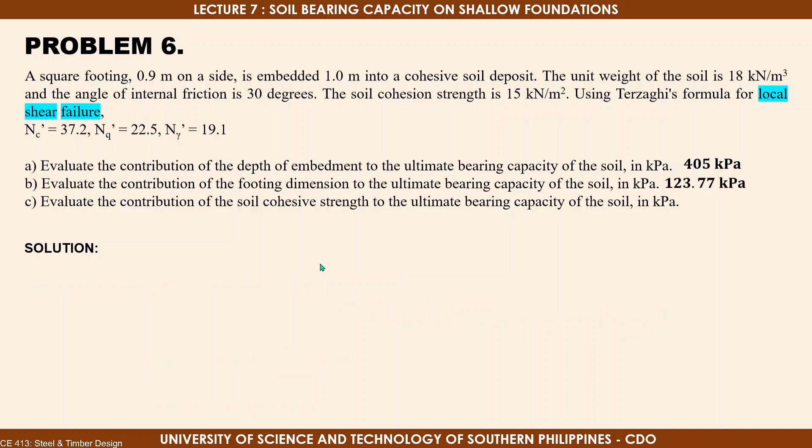And lastly, the contribution of the soil's cohesive strength to the ultimate bearing capacity of the soil. So where is the term that contains cohesion? It's the very first one, right? 1.3 C NC. Now remember, since this is a local shear failure, there's a modification needed. Instead of using the actual cohesion, we use C prime.

So C prime is just two-thirds of the actual cohesion of the soil. Let's solve for C prime: C prime is two-thirds of C, or two-thirds of 15, that's 10 kilopascals. Substitute: 1.3 times 10 times NC prime, which is 37.2. Therefore, we have an answer of 483.60 kilopascals. So that's easy for this problem.

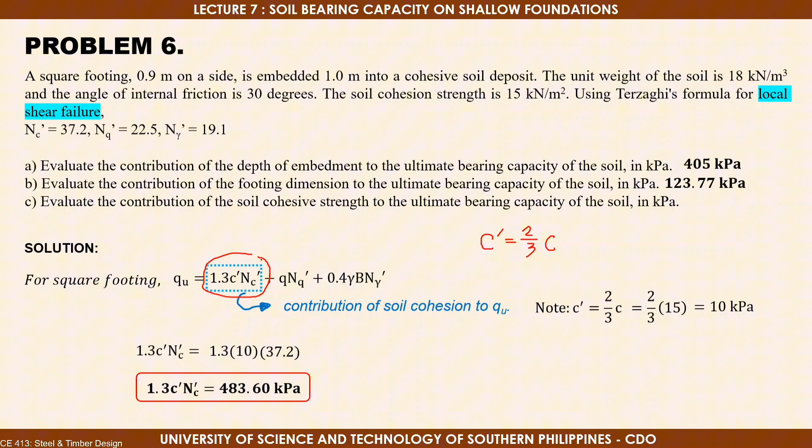Next, after discussing Terzaghi's bearing capacity equations, we move to Meyerhof's bearing capacity equations. The formula for Meyerhof is a bit long and not very student-friendly. In some cases, instructors require memorizing it, but for you, since it's not likely to come out in the board exam, it depends on your instructor if they require the formula for this topic only. But if it were me, I would require it, so you won't be able to avoid it. All you need to do is to understand the different formulas, the different criteria used, and the different conditions, etc.

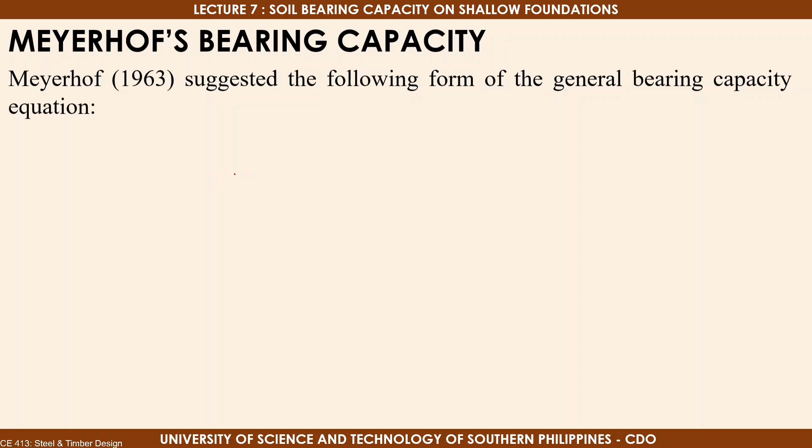So in 1963, Meyerhof suggested the following form of general bearing equations. Actually, Meyerhof just modified the equations of Terzaghi. He just added different factors to it.

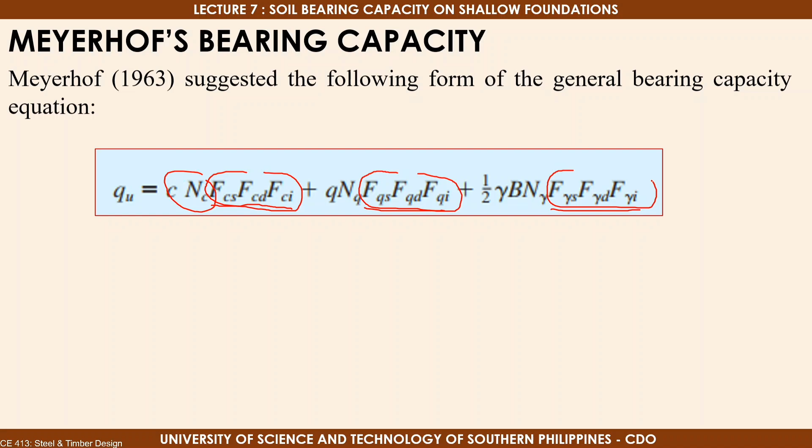These factors, you can see them here for C and NC. But now there's also FCS, FCD, FCI. For Q and NQ, there's a new factor added: FQS, FQD, FQI. And for gamma: F gamma S, F gamma D, F gamma I. That's what's added. Now, what's the meaning of these different factors being added according to Meyerhof?

So for this, they're divided into groups. All the ones ending in S, let's note, are shape factors. So FCS means this is a shape factor - the contribution of your soil's cohesion. Next, FQS is the contribution for depth of embedment, and the contribution for the footing dimension is F gamma S. These are for the shape factors. There are different formulas to consider for solving your shape factors later.

Next, we have depth factors, from the letter D. So all the ones here with D: we have FCD, FQD, and for this one, F gamma D. So these are your depth factors.

Now lastly, we have the load inclination factors. So all the ones with inclination: FCI, FQI, and F gamma I. And lastly, we have NC, NQ, and N gamma - your bearing capacity factors.

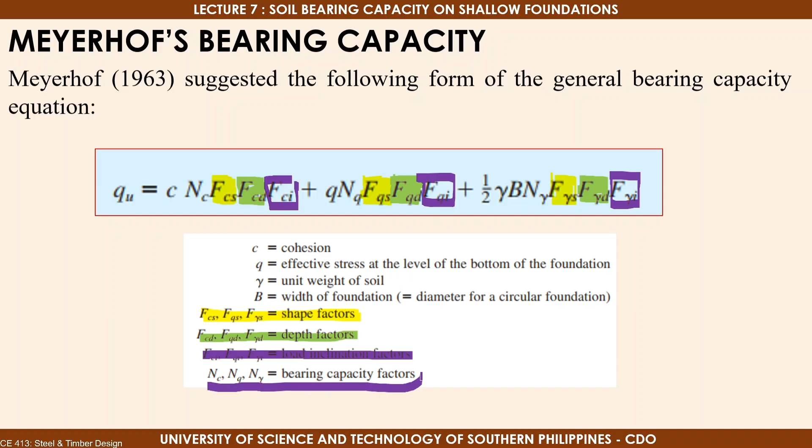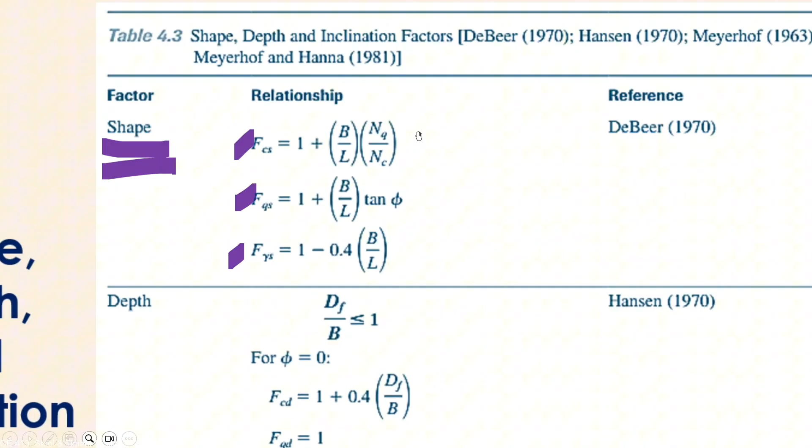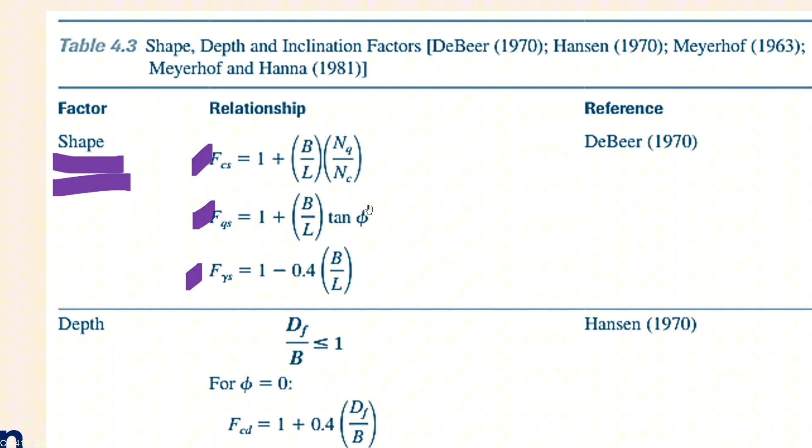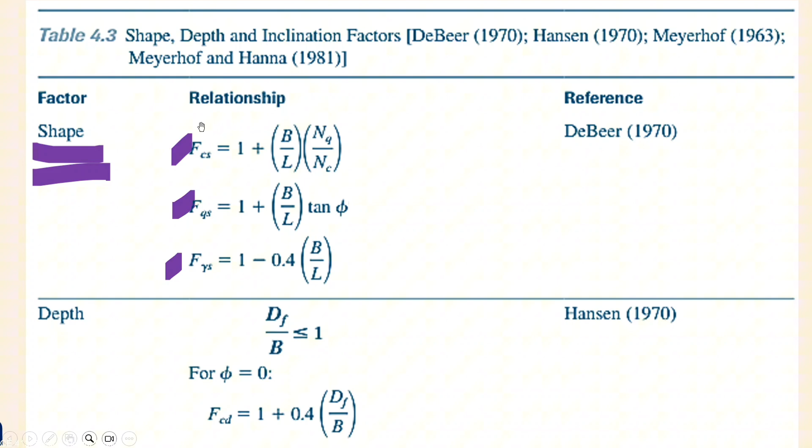So let's discuss the different formulas. First, we have your shape factors. So here's the formula for your shape factor: we have FCS, FQS, F gamma S. You just need to substitute. The parameters needed are, of course, the dimensions of your footing, and of course the angle of internal friction and your bearing capacity factors NQ and NC must be given. So these are what's needed here. You just need to substitute as long as you know this formula.

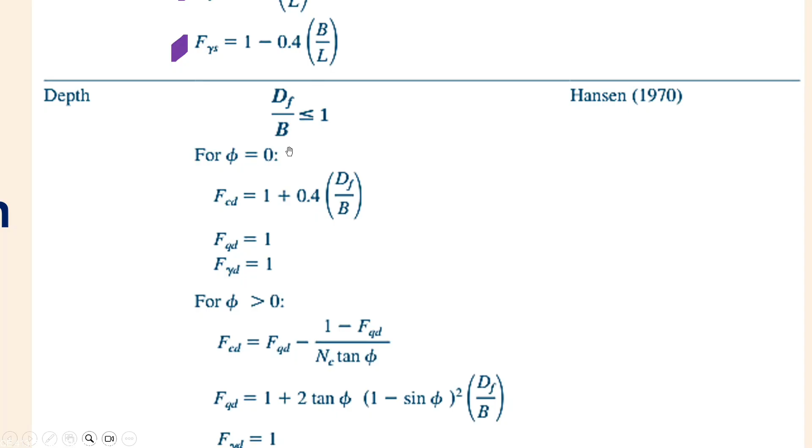Next is the depth factor. Under the depth factor, there's a criteria: either the ratio of DF to B is less than or equal to 1, or the ratio of DF to B is greater than 1. Always remember that in the first case, where the ratio of your depth of embedment and the footing width governs this criteria, this means your foundation is shallow.

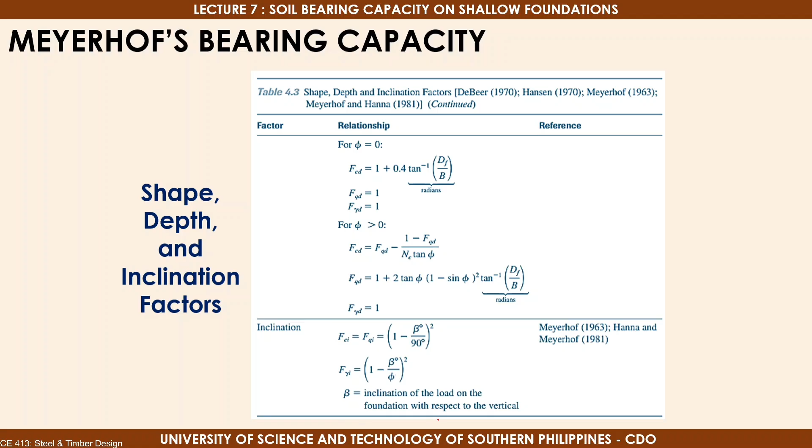A square foundation is 2 meter by 2 meter in plan. The soil supporting the foundation has a friction angle of 25 degrees and cohesion of 20 kilonewton per square meter. The unit weight of the soil is 16.5. Determine the allowable gross load on the foundation with a factor of safety of 3. Assume that the depth of foundation is 1.5 meters and that general shear failure occurs in the soil. Use Meyerhof's formula for bearing capacity.

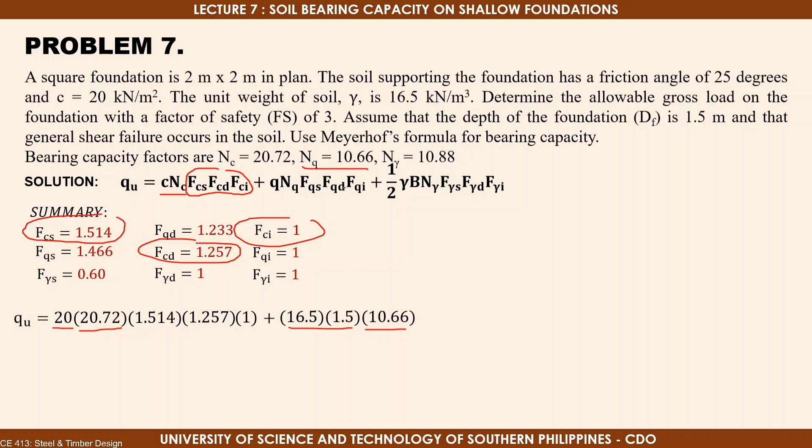Substitute, plus Q and NQ. Q here is 16.5 times 1.5, the depth of embedment, then NQ since it's given, then the factors FQS, FQD, FQI.

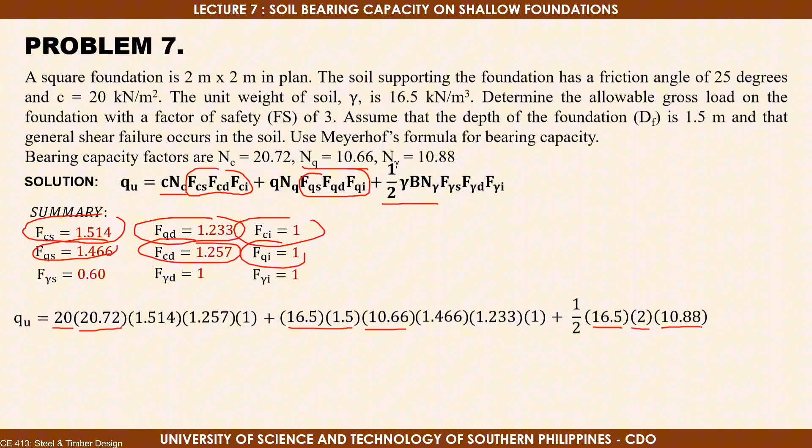And lastly, plus 1/2 gamma B and N gamma, times F gamma S, F gamma D, and F gamma I. That's quite a lot, right? So after this, your ultimate bearing capacity is 1373.26 kilopascals. Be careful when solving these kinds of problems because they're prone to calculation mistakes due to all the steps - prone to error.

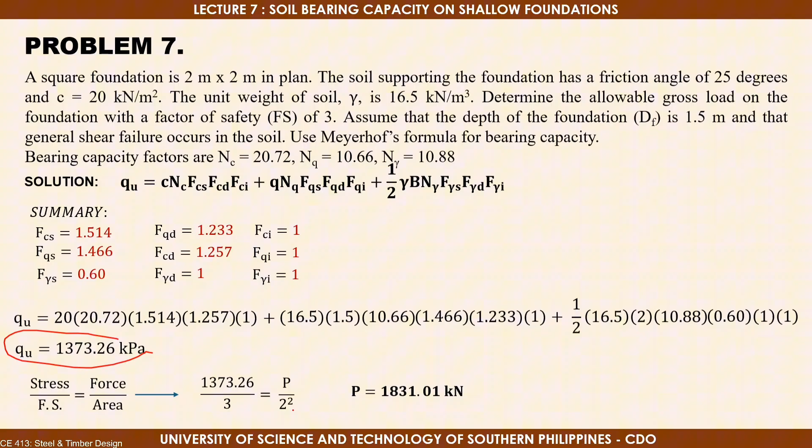Again, after solving for your ultimate bearing capacity, use the concept of stress, which is force over area. Stress equals force over area. Take the stress here and divide by factor of safety. The stress over 3 equals P over 2 squared. Therefore we get the allowable gross load, which is 1831.01 kilonewtons.

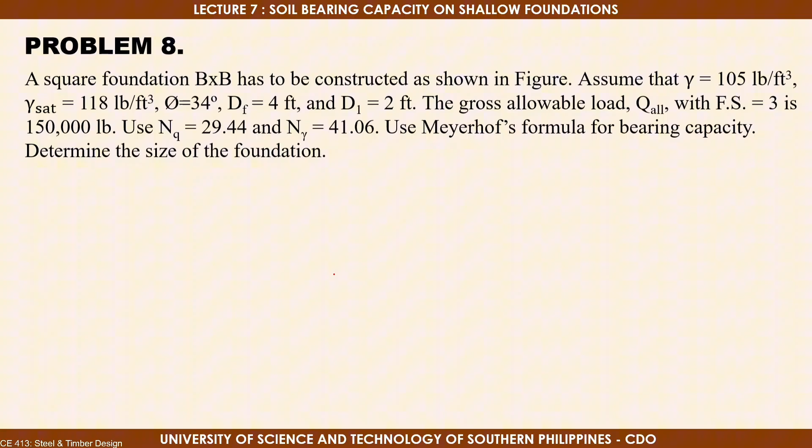Next problem, problem number 8. Let's read this: A square foundation which has a dimension of B times B has to be constructed as shown in the figure. Assume gamma is 105 pounds per cubic foot, saturated unit weight is 118 pounds per cubic foot, and angle of internal friction is 34 degrees. Use depth of embedment which is 4 feet and the D1 distance which is 2 feet - remember D1 is that distance, 2 feet. The gross allowable load with factor of safety of 3 is 150,000 pounds. Use NQ of 29.44 and N gamma of 41.06. Use Meyerhof's formula for bearing capacity.

So what is the goal here? It is just to determine the size of the foundation to use - this size. Okay.

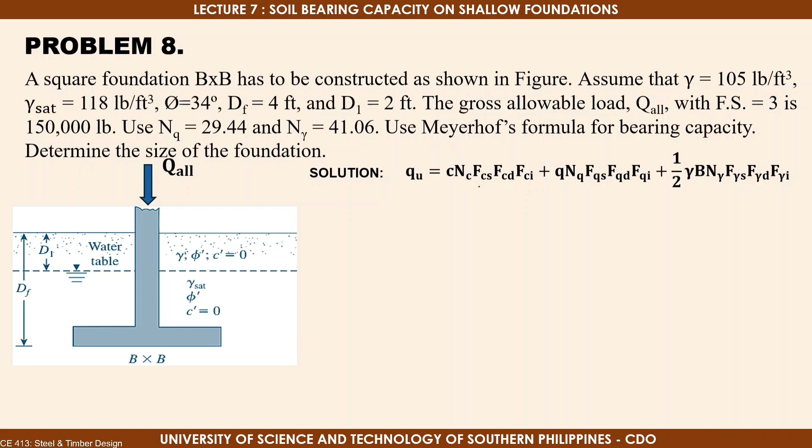Okay, this is the formula for bearing capacity according to Meyerhof. This is the equation. After this, we need to solve for the factors, starting with the shape factors. The shape factors again, we know the equations for these.

Okay, substituting, we get 29.44 over 0. This is undefined, right? Undefined is the value we get here. But we cannot apply this.

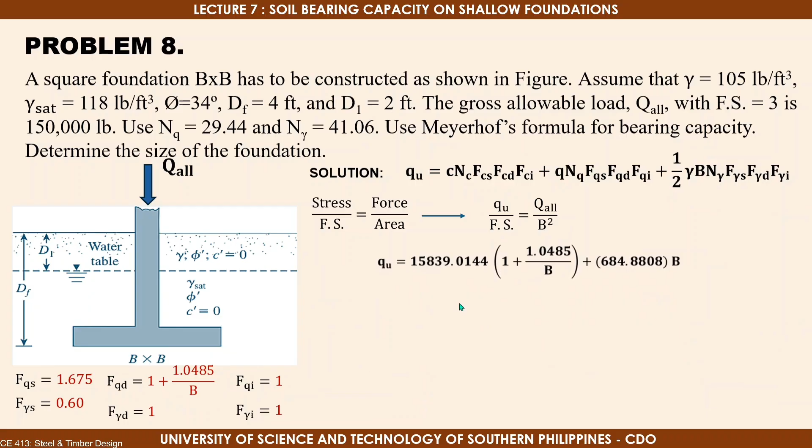So we have this, all over the factor of safety of 3, equal to your allowable load Q all, which is 150,000 pounds all over B squared. The only unknown here is the variable B. So when you shift and solve, you'll get a value of 4.46 feet.

So that's the required dimension for your square footing. Okay.